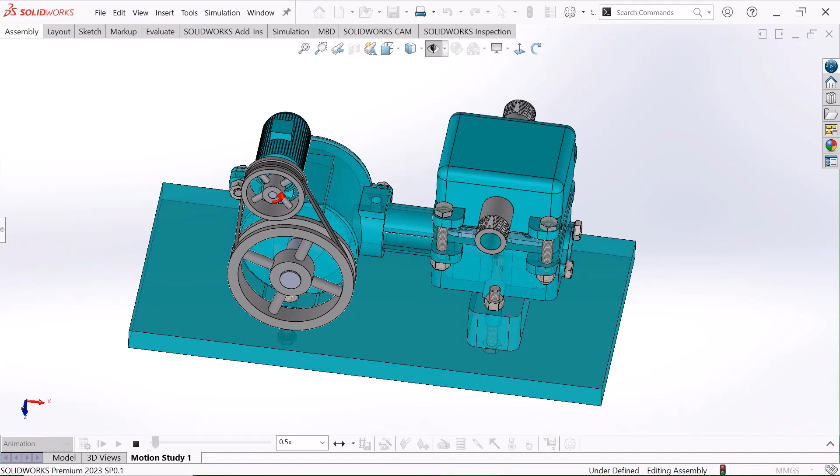This is the suction side and this is the delivery side. This is the piston rod, and inside this piston, and this pulley, this cam pulley, and this is the motor pulley.

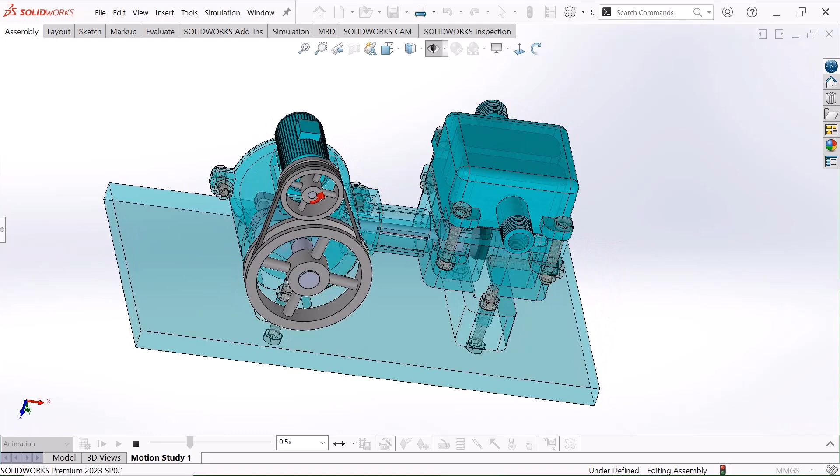This is the cam mechanism. It will work like this, the camshaft.

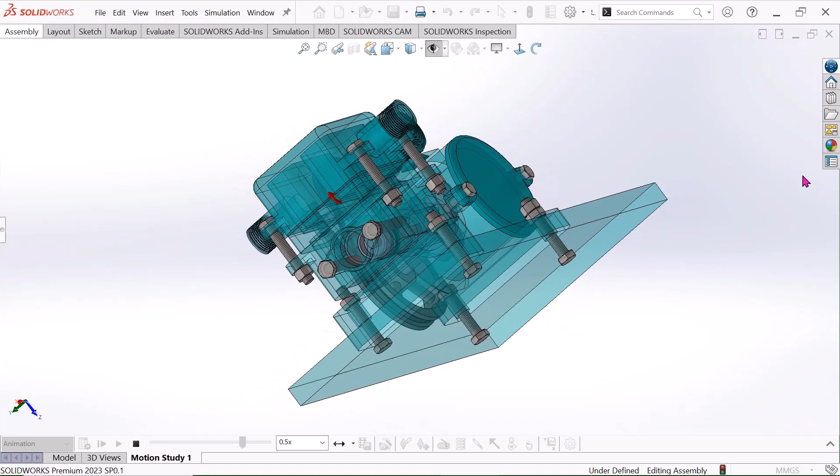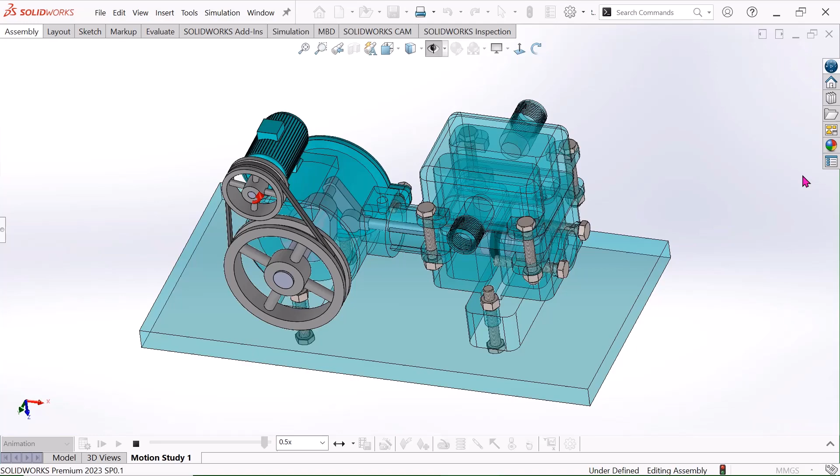Now see, actually it works like this.

You can understand easily. I will hide this, or all the bolts. Just hide the bolts, all of them.

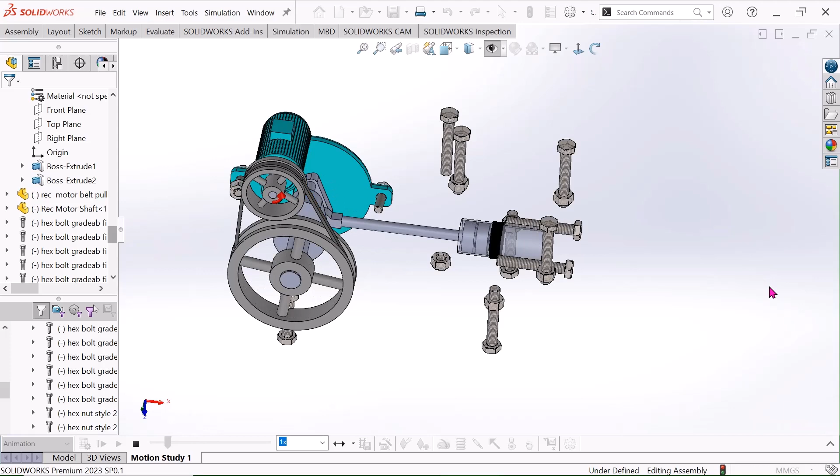What is a reciprocating pump and its classification? A reciprocating pump is a positive displacement pump which converts mechanical energy into hydraulic energy, like pressure energy, by sucking the liquid into a cylinder in which a piston reciprocates, which exerts thrust on the liquid and increases its hydraulic energy.

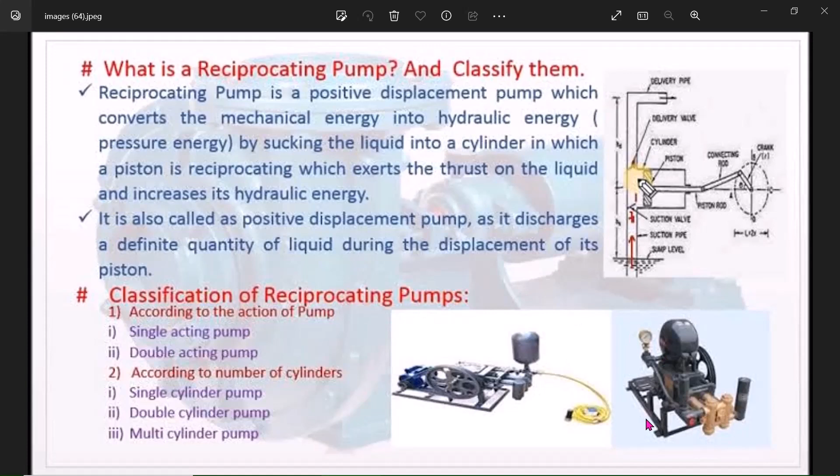This is the flowchart of the reciprocating pump. There are many parts. I will show these parts with 3D and animation. This is the reciprocating pump basic, and this pump, and this pump. I will show 3D animation and a video.

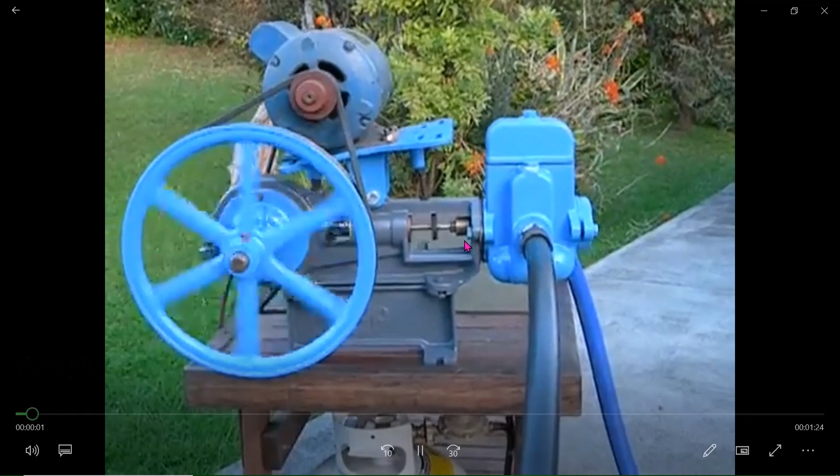Just see, this looks like a reciprocating pump. This is the motor and this is the cam. This completes the reciprocating pump.

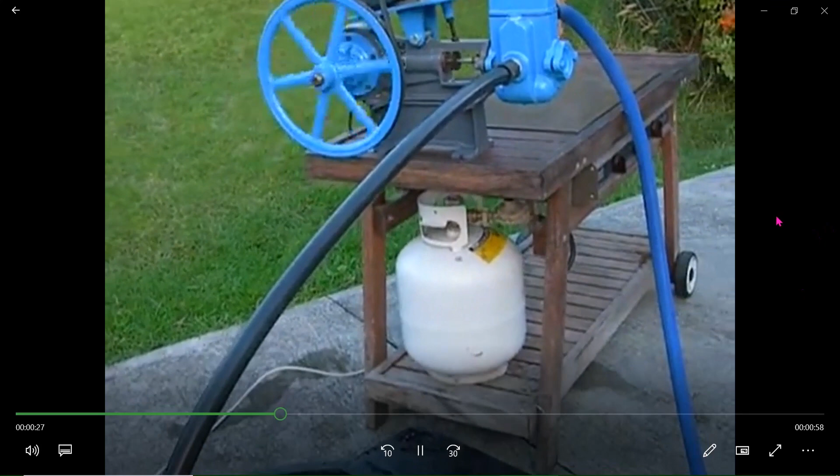Now see, this is the reciprocating pump, sometimes called a piston pump. If you see...

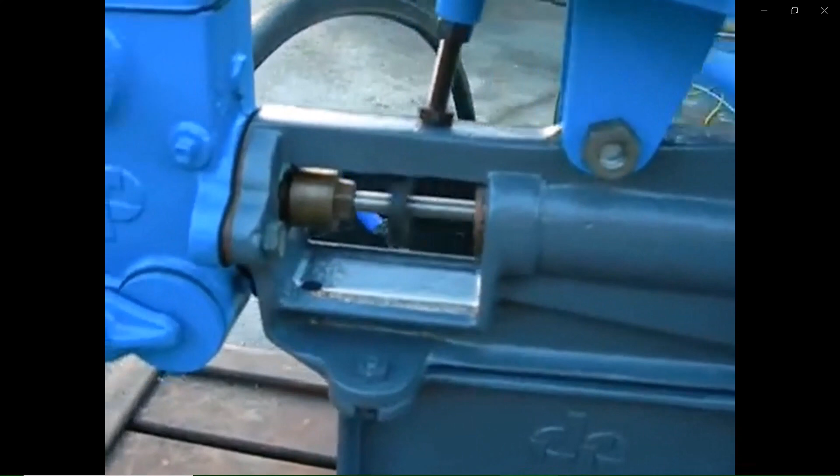This 3D view shows the complete reciprocating pump. I will show all the parts.

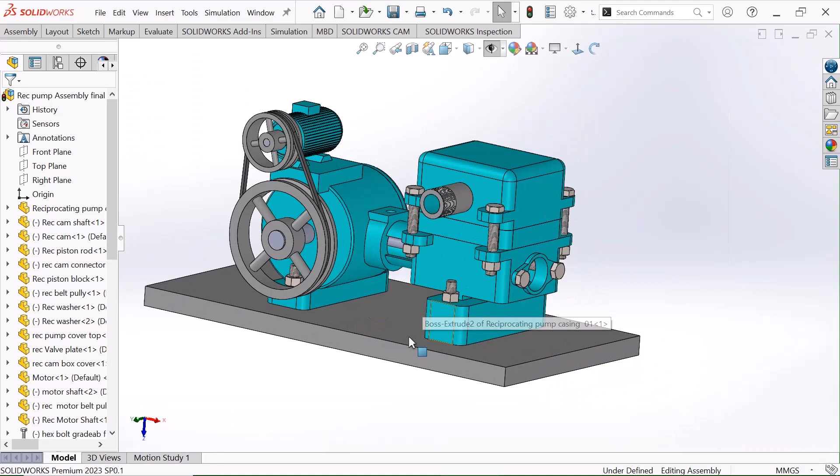This is the main base plate, and this is the base bolt, and there are two parts, this down part and upward part. This is the suction line, and another line is this delivery line. This is the suction line and this is the delivery line.

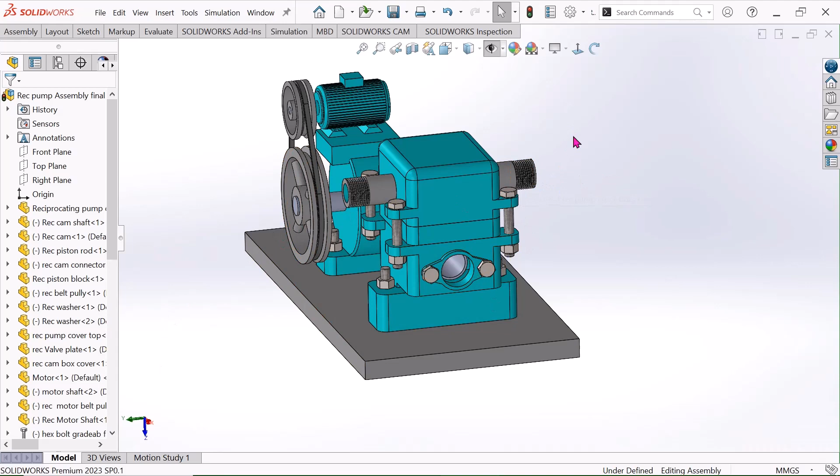I will make another part for this. It will be closed by the blind plate.

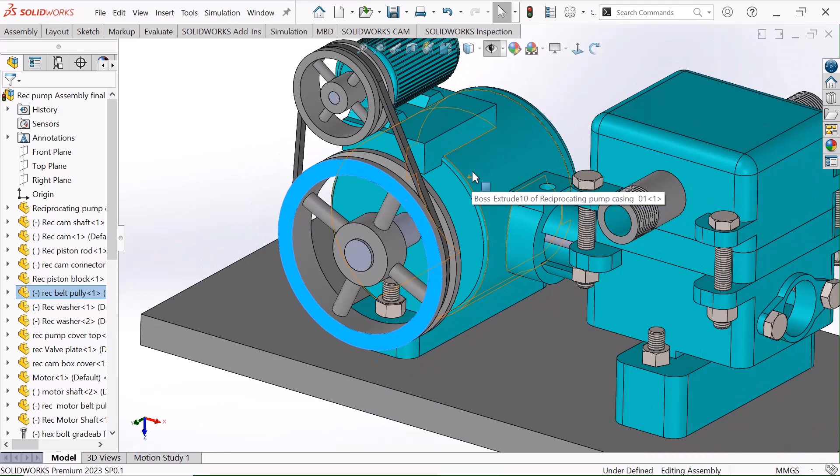Now see, this is the belt pulley, and there is a cam mechanism on the inner side. This is the motor. If you start the motor, then it will run this.

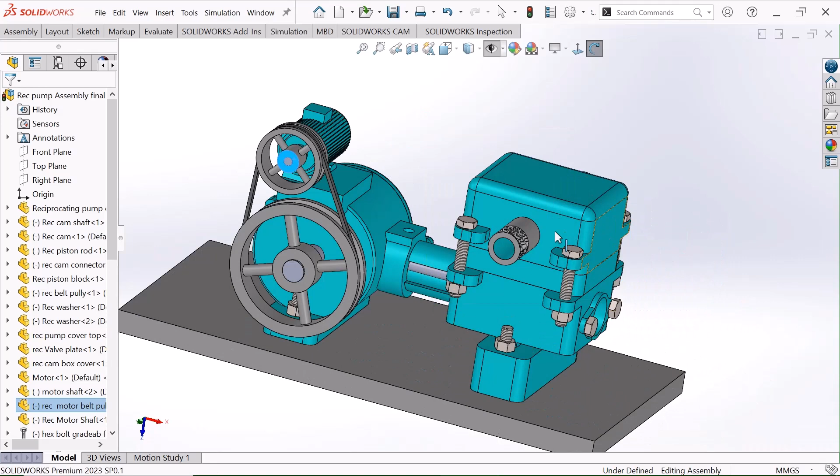Now see, just now I will disassemble this. First I will hide, go to this assembly and go to exploded view. First I will disassemble the bolt. Just click this bolt and drag it.

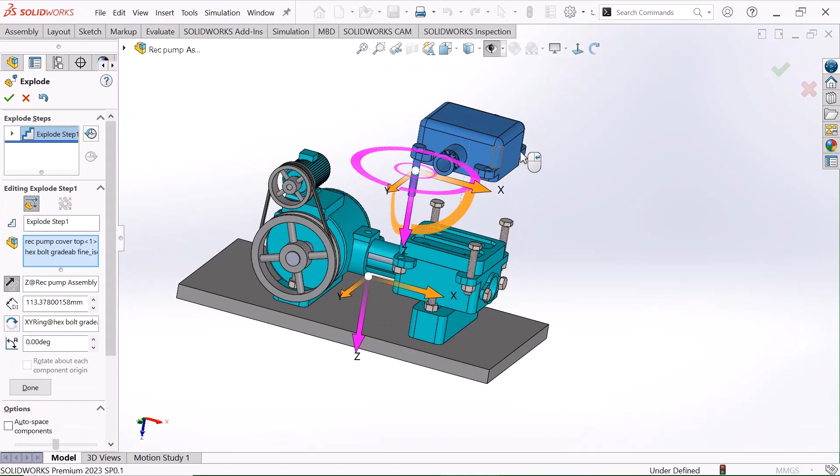This is the top side. Now see the inner side. See, this is the top side. Okay, another side.

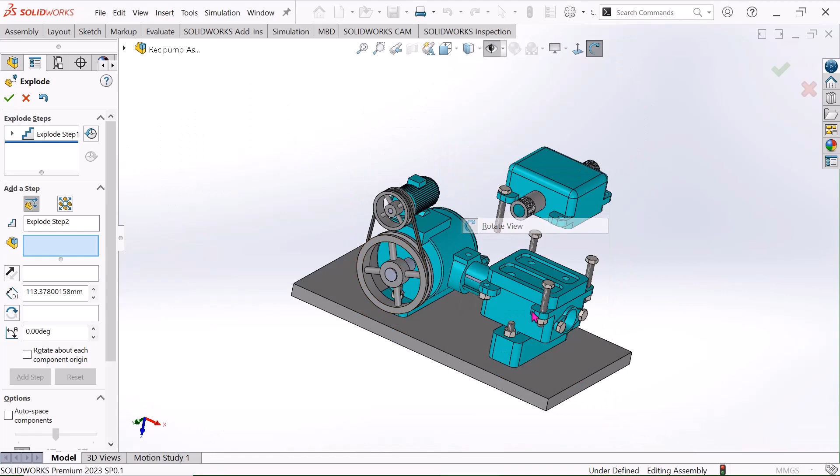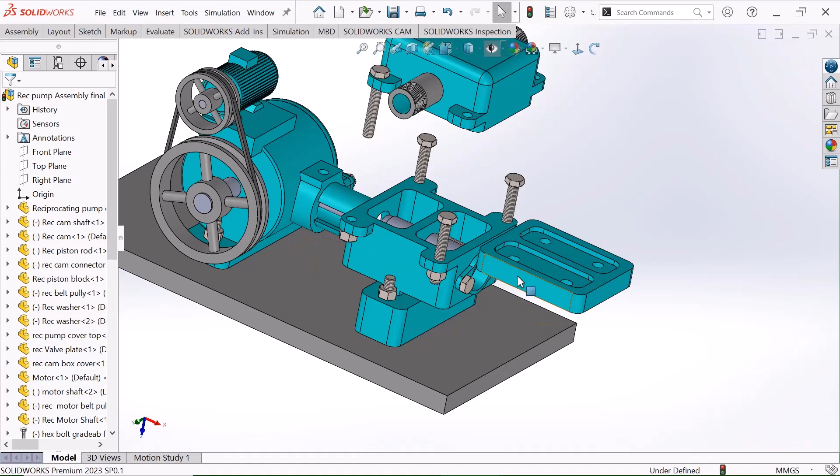See, this is called the valve plate. Just drag it, valve plate. See, this is the valve plate. Just see, this is the valve plate.

This is the main pump shaft. There are shaft and piston, many parts on this.

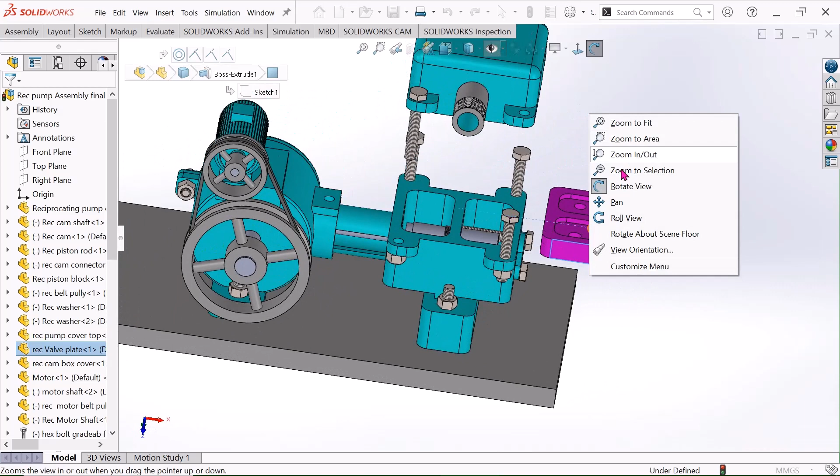Just click and hide this. Now see, this is the piston rod. Yeah, see.

If you rotate this, then it will move this linearly. Okay.

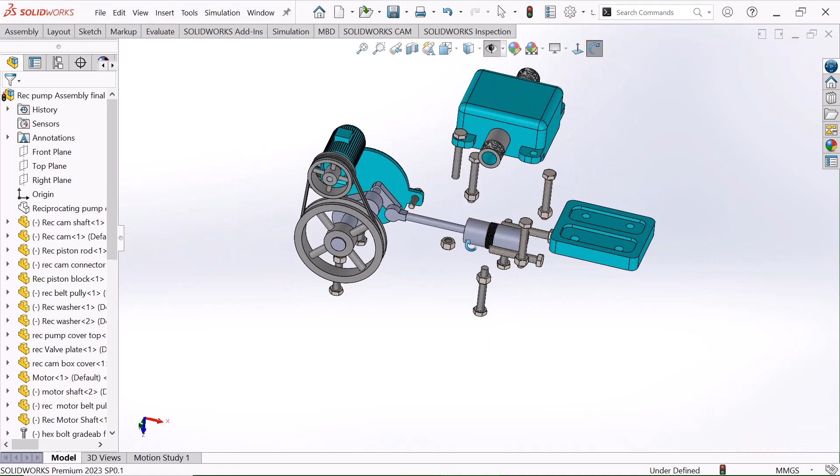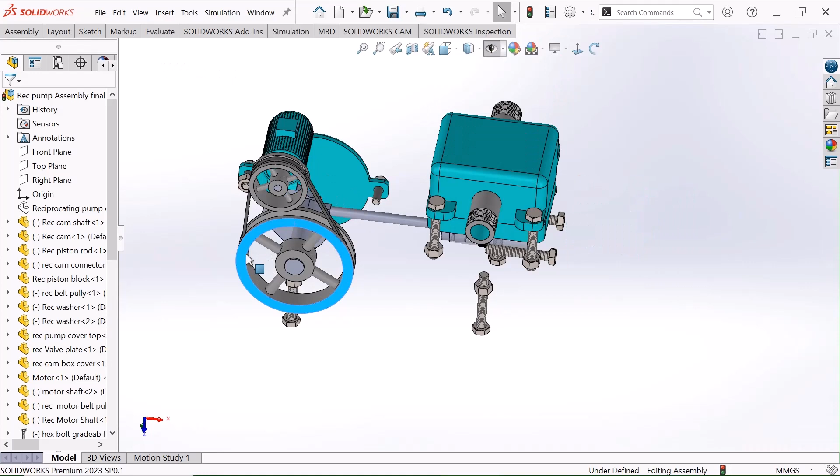Now I click this and click this transparency. Just see, there was a gland, and the inner side is this piston. If you rotate this, just see, then it will move this, or this.

I will again apply this transparency, just click hide. I hide both of these. Now see how it works. Just see, it's working.

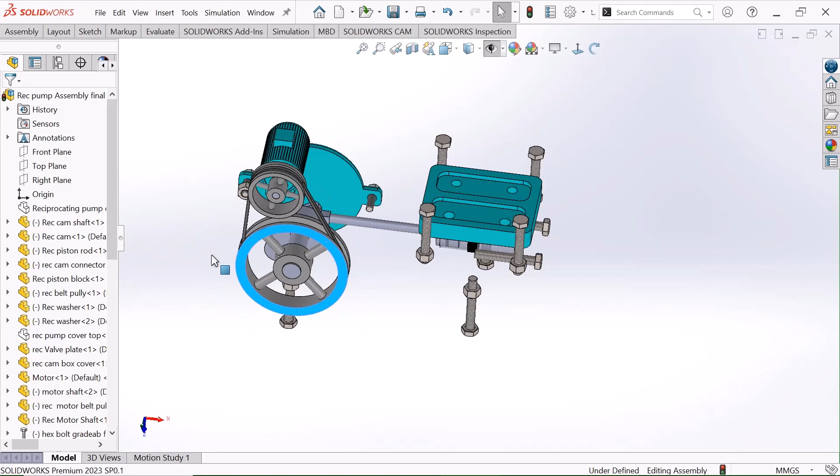Again I will hide this. Just click and hide this. I hide this. Click and hide this. Okay, now you can see this.

Now see, I am starting this, then it is rotating and moving linearly. Okay, now I animate this.

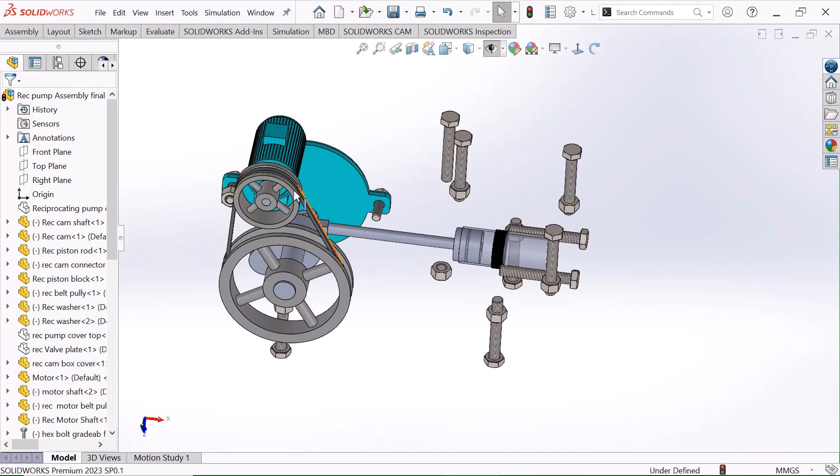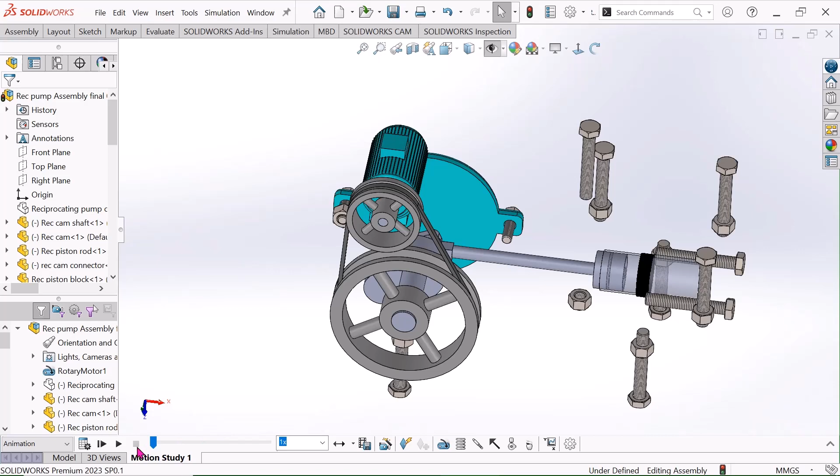Just go to this motion study and choose this motor. I will apply this motor at 100 RPM. Just click, okay. Now I calculate this. Now see this animation.